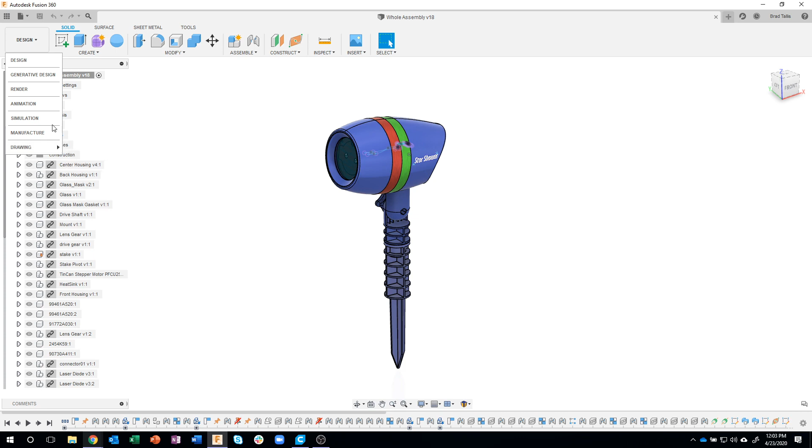Okay, so I'm going to switch into the animation workspace. I've already completed this, but you can kind of see this exploded view or exploded representation of this assembly. I'm going to go through and show you how I went about doing this.

Okay, so with the animation module, it's kind of broken down almost like editing video, for example. We have things we call storyboards. So this you can kind of think of as a storyboard.

Now I left this up so you can kind of see what the final product's going to look like, but I'm going to create a new storyboard. When I do that, a clean one basically, it's going to go back to its fully assembled situation.

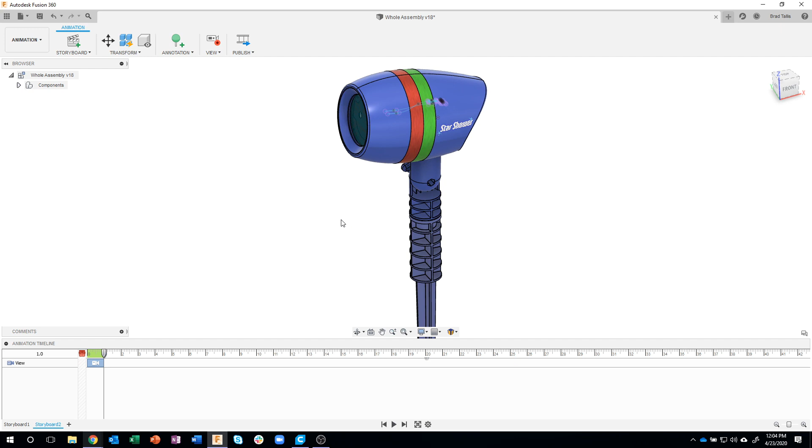Okay, in the transform menu we have a lot of commands, and you'll notice we have auto explode one level, auto explode all levels, and manual explode.

Now unfortunately - actually, I should say fortunately - we're not going to use any of these today, and the reason for it is these explodes kind of do a radial or spherical explode, and this device has a lot of components that are inline with each other inside the housing. I don't want it to go radially or spherically - I kind of want them to stay in line. So I actually find using transform components and doing it myself is faster and easier than using these explodes.

Okay, for example, when I do a manual explode, it asks for a direction and a spacing and all that kind of stuff. We're just going to transform these components, and I think you'll see why here in just a moment. Once we've transformed all of those, we can then save this and bring that into a drawing.

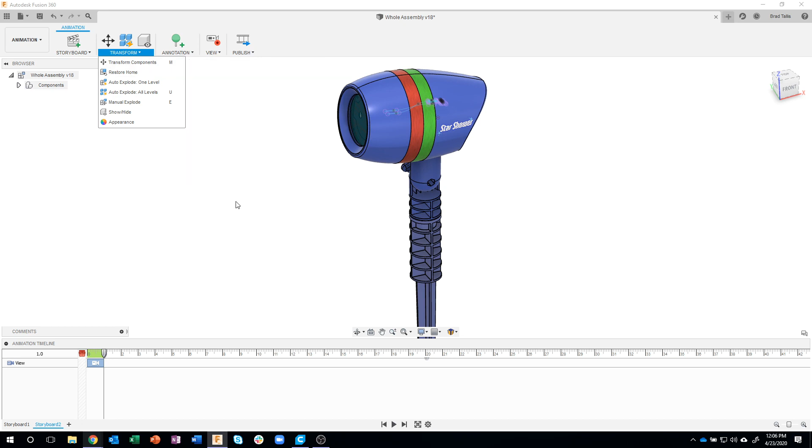So I'm going to start by just saying transform components, and you'll notice that it's asking which components - and you'll notice it's plural, which means we can do more than one at a time. So I'm going to start by expanding the components over here, and I'm going to expand open this whole assembly so I can see everything that's in here.

Now, if I look at the front view, you'll notice that the main unit is kind of at an angle, and we did that using that pivot joint, the rotational joint right here. So it's at an angle, and that's going to come into play here in just a second.

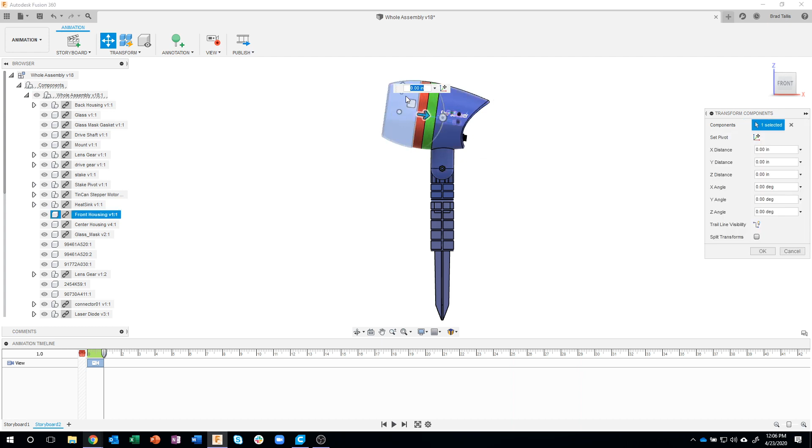So I'm going to click on that first component, and notice that the direction arrow is actually in line with this component, not just straight horizontal. So this is great. I'm going to go ahead and drag this, and it's almost like we're pulling that off of the assembly.

Now, I don't care how far. I could be very specific, I could make everything move 1 inch or something like that, but in this case I'm just going to start moving some of the components. Now I've just moved this front thing. I could go ahead and say okay, and you'll notice that it captured that into our animation timeline.

But I'm going to show you some cool tricks. I'm going to do transform. Notice it remembered my last component, so I could always come back and make a change to that. I could push that along and it's going to get recorded.

I'm going to hit the little X next to components, and I'll go ahead and grab this mount. I'm going to drag that to the left also, maybe like here. Okay, now here's my first tip.

Instead of saying okay, I'm just going to clear my selection. So I'll go ahead and clear that selection, and I'm still in my move or my transform, so I'm not having to go to the menu over and over again. In fact, we'll pretty much do everything with just this one menu over here on the right.

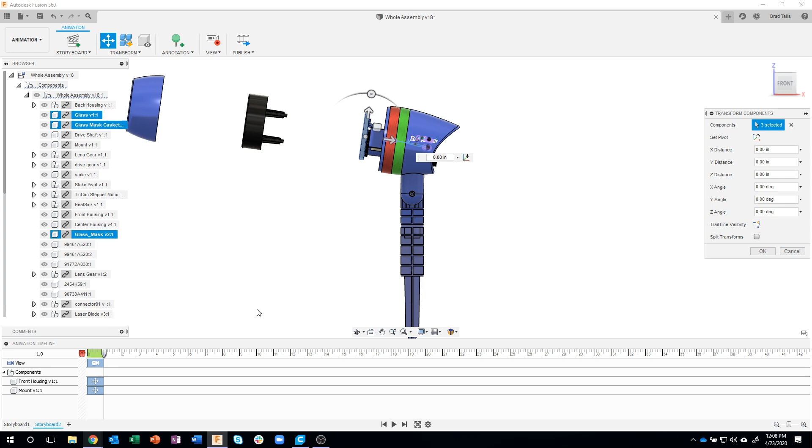So check this out. I can actually come in here and select the glass. I'm going to control my selection by holding down my control key, and I can grab the gasket, and then finally I'm also going to grab the mask. Let's just drag this to the left a little bit, like so. So it's moving all three of those components at the same time, almost like we've grouped them together.

I'll clear my component, and now maybe I'll just grab the glass, and let's pull the glass forward maybe to here. I'll clear my selection, click on the glass mask gasket, and let's just move that maybe toward the middle a little bit.

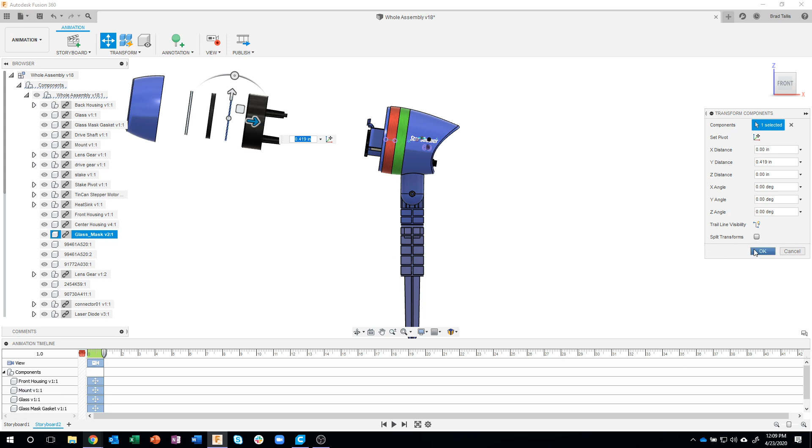Okay, and then I'll clear that, and I can either pick it on the screen or pick it from the browser, and I'll bring the mask back like so. So we moved all three of these almost like a grouping or like a sub-assembly. We moved them where we wanted, and then we kind of broke them apart. So I'm going to go ahead and say okay for now, just so we can do some other things.

But if I were to rotate this, we can now see that we've pulled all of these components out. And I can always come back and move these if I need to.

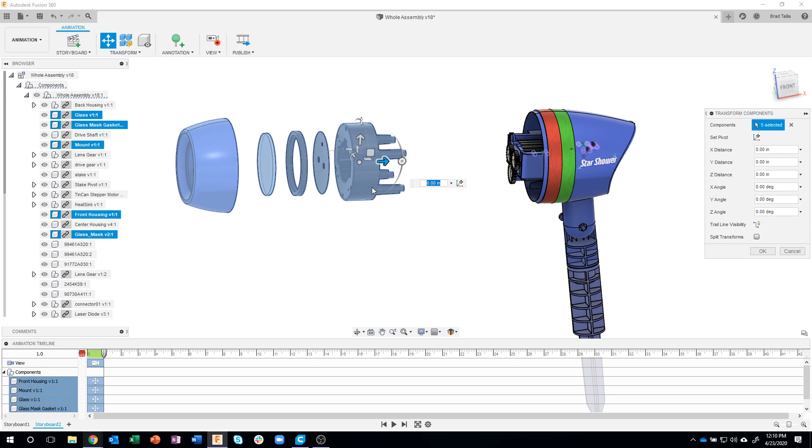So I could grab, I'm going to control my selection, grab all of those. In fact, maybe I'll leave that guy. And let's just drag those a little bit farther forward. So I can always come back and kind of tweak my design.

So let's take a look at that. That looks pretty cool, pretty evenly spaced. Okay, so that's kind of the front of the whole thing.

So now let's maybe work on the back of it, and we're going to leave the center part where it is. So I'm going to grab that guy, but I also want to move everything that has to do with this also. So I'm going to grab that guy and that guy, so the stake and the stake pivot.

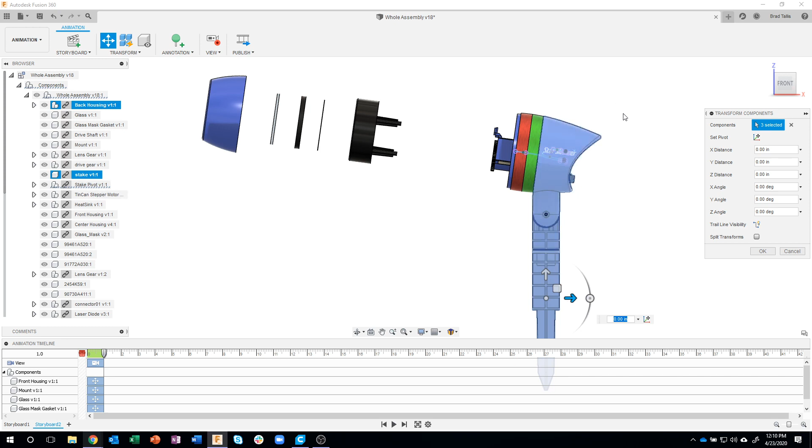We can kind of see if I scroll down all of the things that it's picked and stuff. Okay, there's the stake pivot. I'm also going to zoom up a little bit. I'm going to grab the nut, okay, and then the handle is kind of behind it.

So I'm just going to click and hold, and you've seen me use this before where you can pick through, and pick like edges and faces and stuff, but notice in here it's allowing me to actually pick different parts or different components. So I'm going to grab, this is that little knob guy, okay?

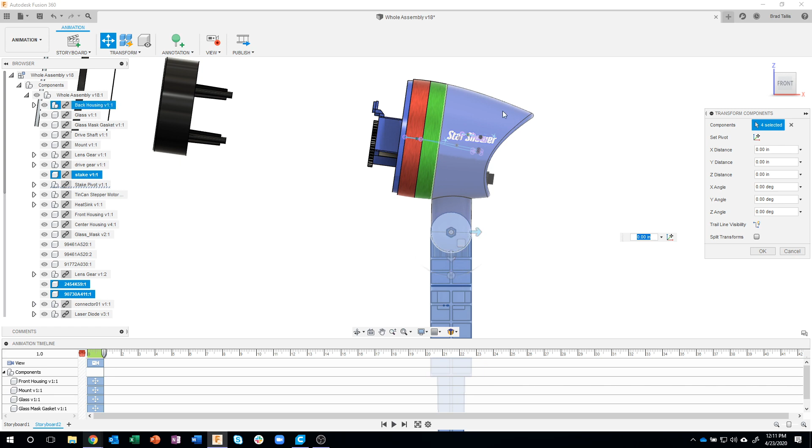Now, notice what happened with my arrows. Now they're pointing to the right and not in line with this component. So here's another little trick: I'm going to unselect this guy and then select him again. Because it was the last thing I selected, it reorients my pivot to be in line with this guy. So if it's not pointing in the right direction, you can unselect a component and then reselect it to have it be the last selection.

Or I could come in here and say set pivot. Let me put this back to normal, I'm going to set it there. Notice my pivot is now on the last thing I selected, which was this stake pivot, but the arrow is pointing the wrong direction. So I'm going to say set pivot.

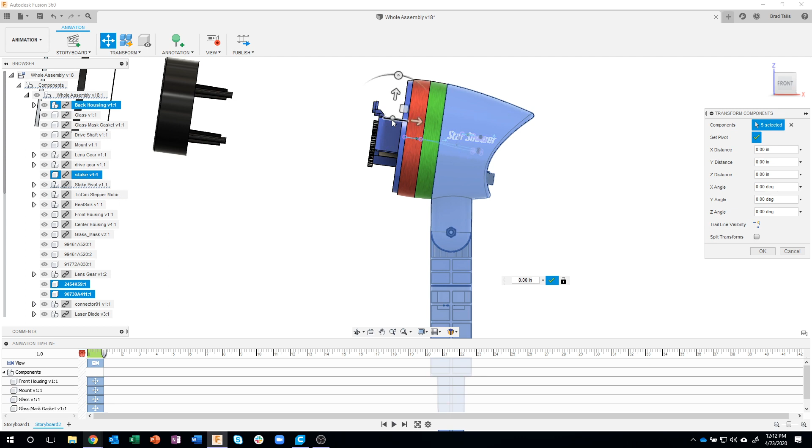And what this allows me to do is reference anything else. So I could come over here and click on an edge, like this edge, or click on this part, and it's going to reference that. Now you can see it jumping around because there are a lot of edges, but I'm just going to click on that face, for example. Now I have to remember to say I'm done setting my pivot.

So I'm going to check that, and now I can drag these components pretty far back because we have a lot of stuff going on in there. I'm going to drag this back to here, and you'll notice it's staying in line with this. In fact, I could even turn on trail visibility if I wanted to, and it's going to show the direction those lines are going.

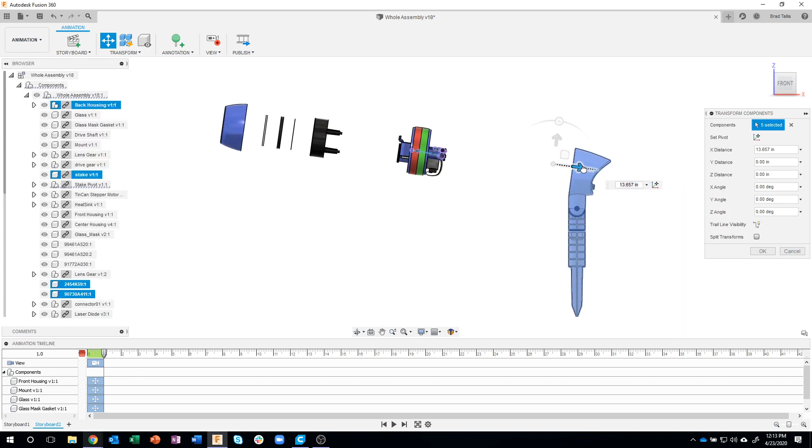Let's just go maybe to right there, and pull it back just a little bit further. I'll hit the little X right here, and now I can grab this component and this component. Again, notice the orientation is incorrect, so I'm going to set my pivot. I'll just click on an edge or a face or something like that, and drag this down.

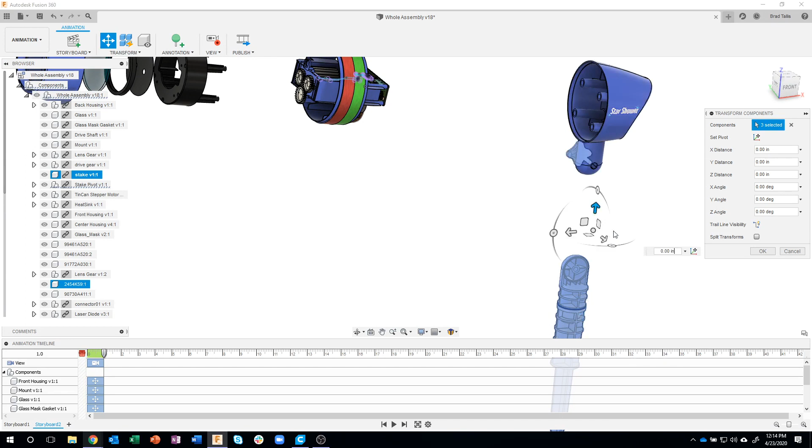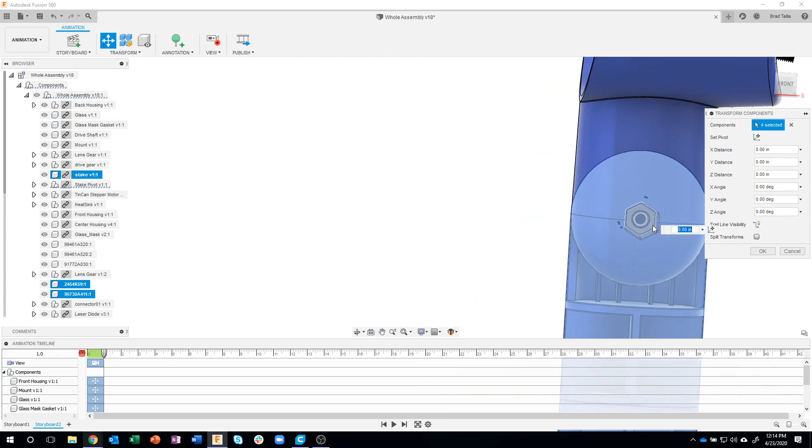Now, if I rotate, you'll notice I forgot to bring the knob and the nut at the same time. If I just add that in there, it's not going to snap down, so I'm going to undo so it goes back to where it needs to go. Then I can control select. So undo can really help you in situations like this where I accidentally forgot something, or I moved a whole bunch of stuff and one little screw didn't move. I could undo back and grab it.

So now I'm going to drag this down, and sure enough, the knob and the nut moved with it. I'll cancel that guy, click on this guy, and let's move that one down just a little bit. I'll cancel or uncheck my selection. I'll click on the knob, and I'm just going to drag it back.

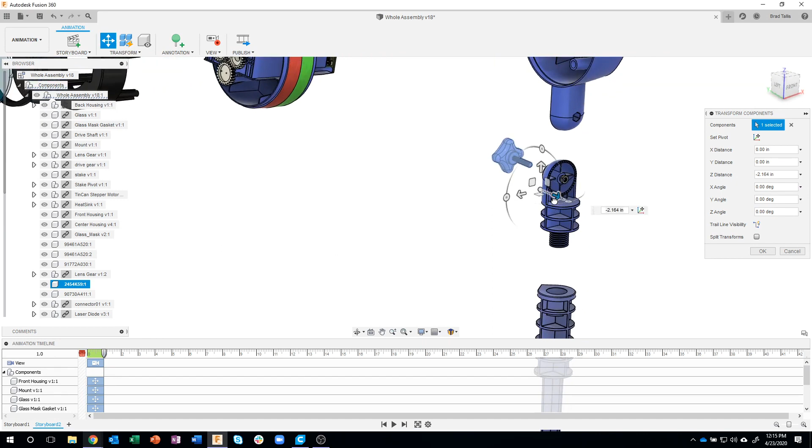I'm doing this in 3D so you can see what's going on here, and sometimes I'll rotate around and get it positioned where I want it, like how far back do I want it. Because I'm going to end up creating a drawing of this isometric view, so sometimes I'll try to get my view to be kind of isometric like this and see what's being blocked, do I need to spread these things out a little more. I try to get it as close as I can to the view it's going to be. So for example, I just clicked on this corner of the cube, and I can see I could probably bring that knob back in a little bit.

Let me click on the hex nut there, and I'll just bring this over here a little bit, kind of equal spacing. So that's another tip I'll use, is I'll get this in the orientation that's pretty close to what I want it to be.

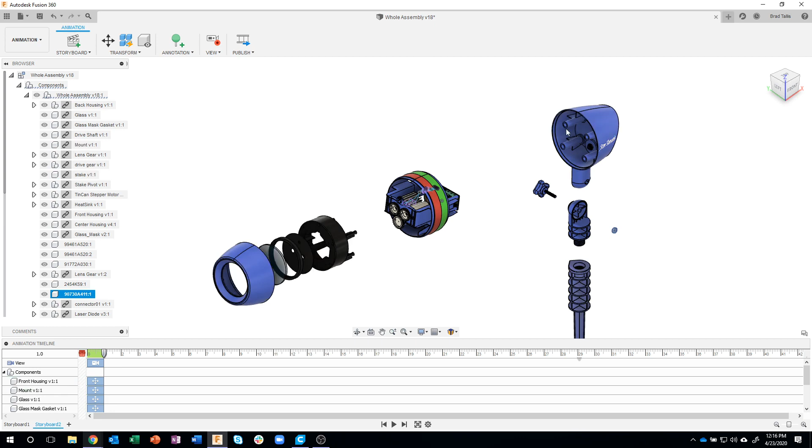Okay, so pretty quickly here we've broken apart the front housing stuff and the rear housing stuff. Now what's left is all of this center stuff. So I'm going to do the exact same thing. I'll say transform, and let's just grab these gears. I'm going to control select these gears, and I'm just going to bring them forward a little bit, somewhere like so.

I'll leave them grouped together since that's kind of how they're going to end up on the actual assembly. Now here is where I want to start working with this circuit board.

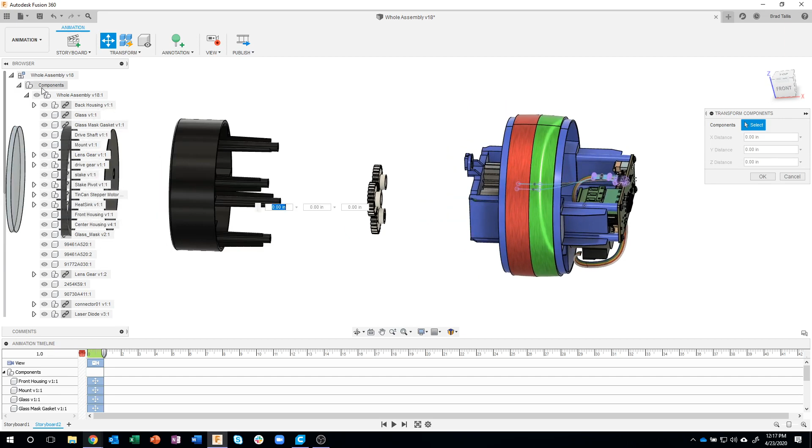There's actually a lot of components. You'll also notice some wires and some sketches going on. Now you're going to see here pretty quick, we're not going to be able to move the wires, and they don't even show up in my browser, but we'll get to that in just a minute.

If I were to come in here and select the star board, if I were to just grab the board in this particular situation, you'll see sure enough it moves the circuit board, but all of my connectors stayed put because I added those later.

I've got these screws in here that kind of hold the board. Maybe I want to move all of those together. Okay, so I'm going to undo back.

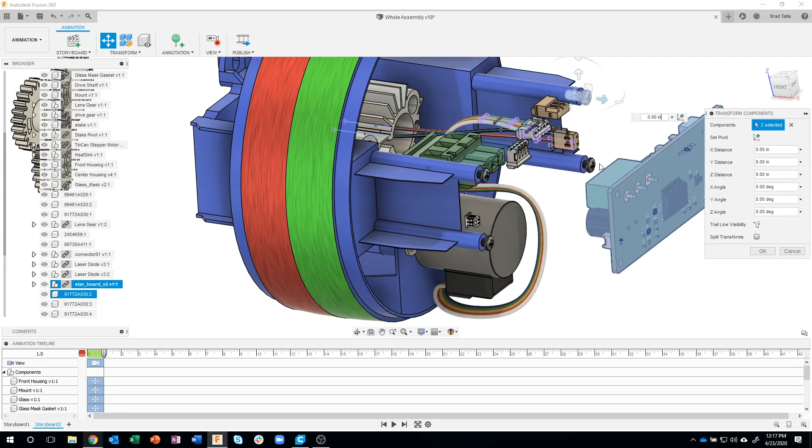Now I can come in and select, for example, I'm going to add - oops, let me, because I moved, it wanted to jump again, so let me do that again. Let me go move. What's the component? So I'm going to grab the star board. Scroll down here. I'm having a hard time seeing. There it is. So I'm going to say that's the star board. I'll zoom up so I can make sure I'm grabbing everything I need.

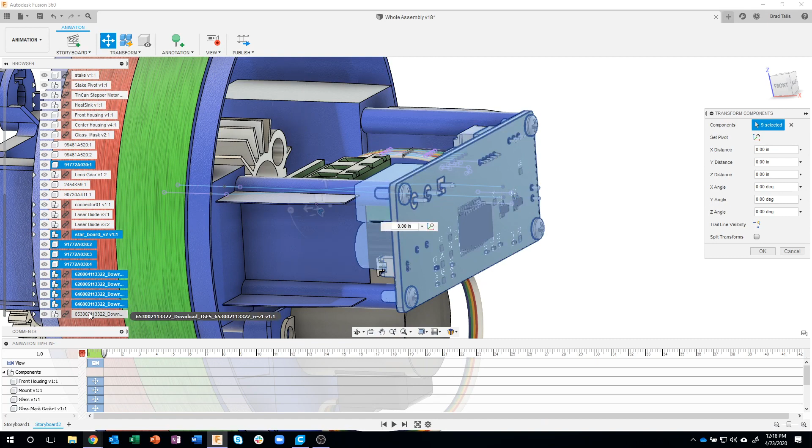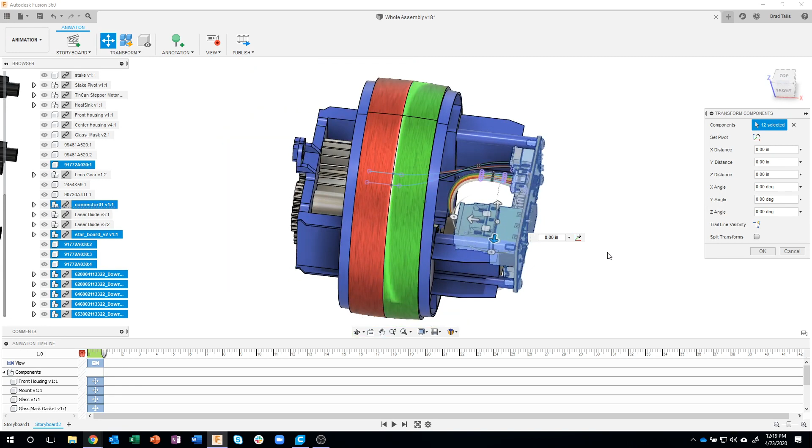So I'm going to select these 4 screws, and I can either do it on the screen itself, or I could have done it from the browser. Then I'm also going to make sure I grab my connectors, and I can kind of see just by hovering over these, they highlight on the screen. So I know that those are my connectors, so I'm going to add in all of those connectors, and then finally I have one more connector on here that I want to make sure that I add, which is this guy. Okay, I want them all to move together. And let me make sure I'll grab that guy also. Okay, so anything that kind of has to do with the board and the connectors.

So I'm going to zoom out a little bit, kind of see how much room I have, and let's just drag this back a little bit. Okay, maybe somewhere like so. I'll stop my selection. Let's zoom up here, and sure enough, I see some wires and stuff, but like I said, I can't move those wires. But it looks like everything that I wanted to move did move, so that's good news.

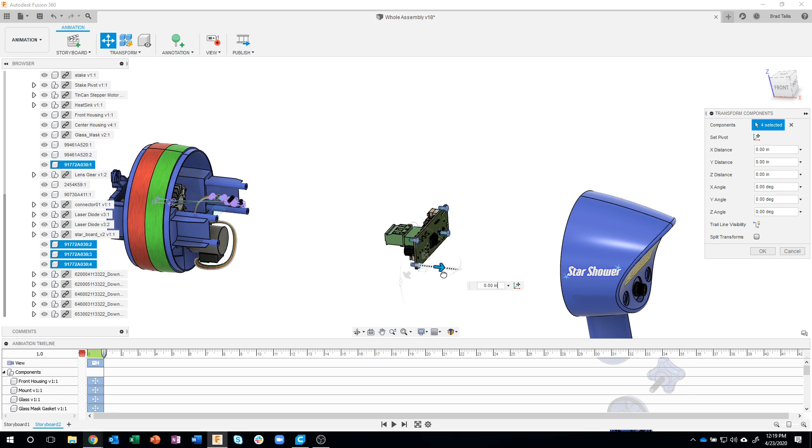Well, now I want to show the screws kind of assembling this. So I'm going to grab that screw here, here, and here, and here. Now again, I could have organized my browser. I could have created a subcomponent called screws and put these 4 inside that subcomponent and then just moved that subcomponent, for example. So kind of a quick way to speed things up. But there we go. Okay.

Now, since everything's looking pretty good, I'm going to grab the laser diodes, those 2 laser diodes, and I'm also going to grab the heatsink at the same time. And let's just pull those back a little bit, like so. Maybe I'll bring the heatsink back a little bit. And now you can kind of see, didn't give myself enough room, for example. But that's okay, we can move things around. So I'm going to go ahead and now grab the laser diodes.

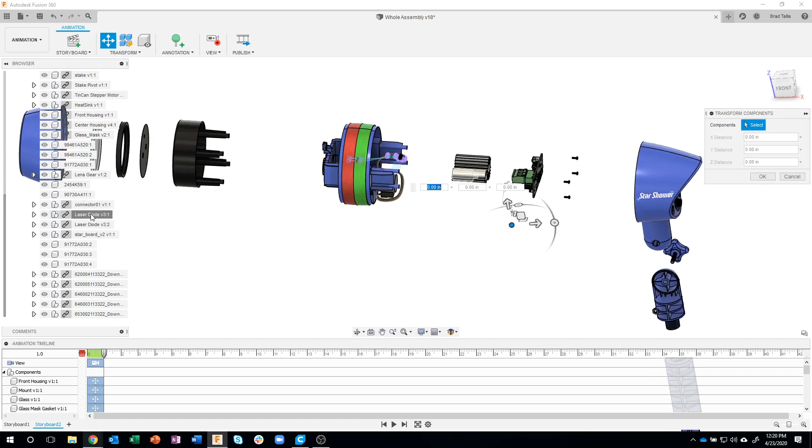And notice in this situation, my pivot is not pointing in the right direction. So I'm going to set my pivot, and I'm just going to grab one of these edges of this heatsink. That should be good. And let's just drag that forward a little bit. And now we can kind of see that the laser diodes are going to go into the heatsink. The board and the screws are all going to assemble back here.

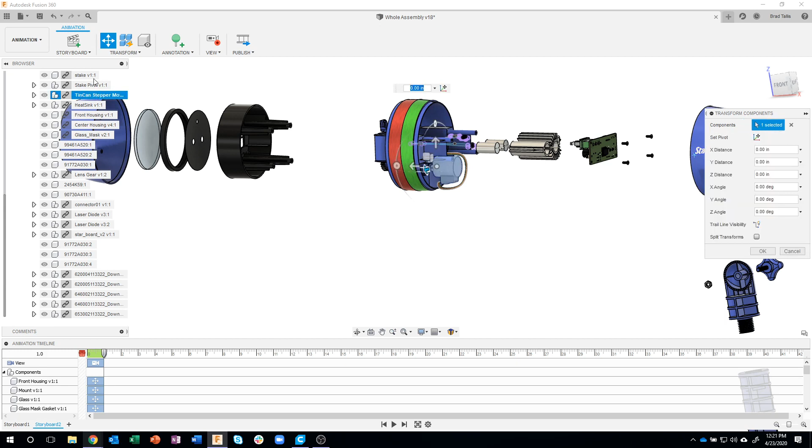Let's work with the stepper motor now. So I'll do a transform, and let's just look for the tin can stepper motor, which is right here. This is another reason why you definitely want to label your parts, give them names. For example, I also need to move the drive shaft. There it is. If I left everything numbered 99461A or whatever, I'd have to turn parts on and off. It's much more difficult. So definitely give your parts some names.

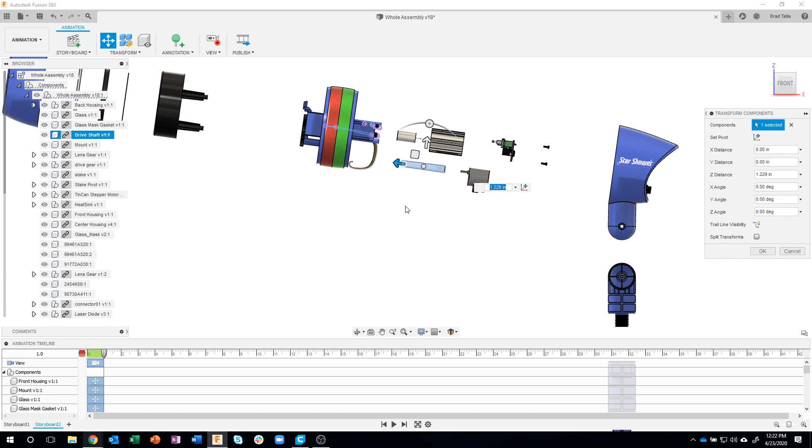So I'm going to slide the stepper motor back, and move it down a little bit, and back. Then I'll grab the drive shaft and pull that off of the stepper motor a little bit, grouping a lot of the internals right here. I must have undone too far back, so let me move the gears back. Let's do that guy, and that guy, pull them forward. Okay, so we pretty much have everything out of this center housing except for these wires.

Now, if I look over here, you will not see a bodies folder, only components. In fact, if I fold that up, pretty much everything goes away. In my example, these wires are actually a body, not a component, so I don't see them in this list. So how do I get rid of them?

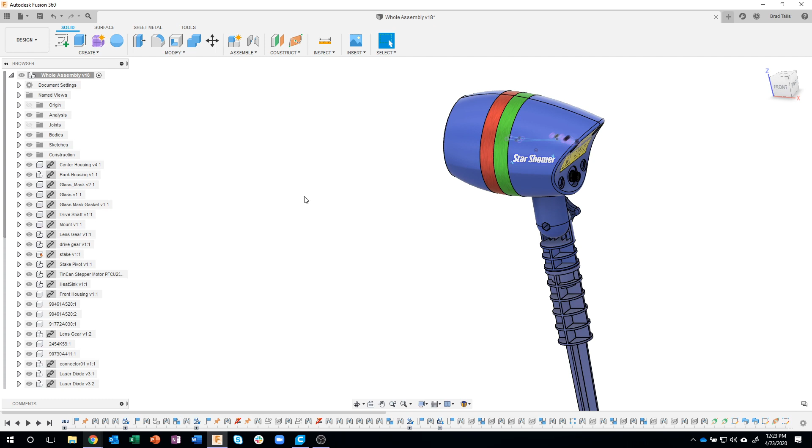Well, all I need to do is switch back to my design workspace. Notice it's all assembled because we're only doing that exploded view in the animation workspace. Let me turn off the back housing so you can see what's going on. I'm going to turn off the bodies and you'll see those wires disappeared.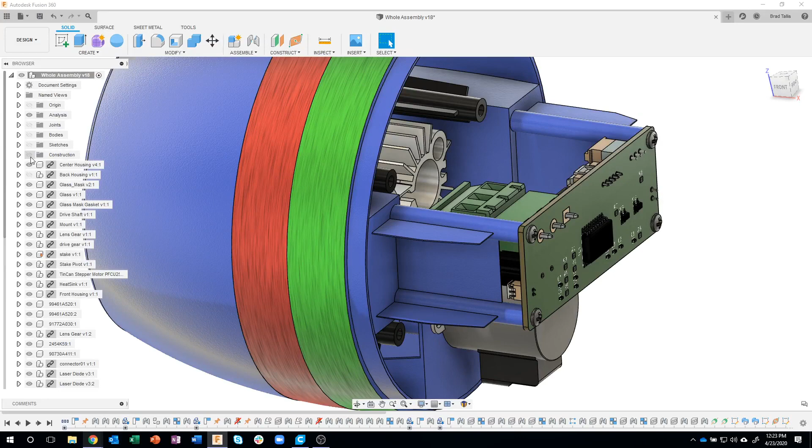You'll also notice some of my construction geometry and sketches used to create those wires are being displayed, so I could turn off my sketches. And finally, those little axes you see in here, I could turn off my construction and those will go away. I'll turn the back housing back on.

Then I'll switch over into my animation workspace, and we'll see that those are no longer being displayed. So you can turn them on or off just by going back to the design workspace and turning off those bodies. So pretty quickly, in just a few minutes, we created this exploded view.

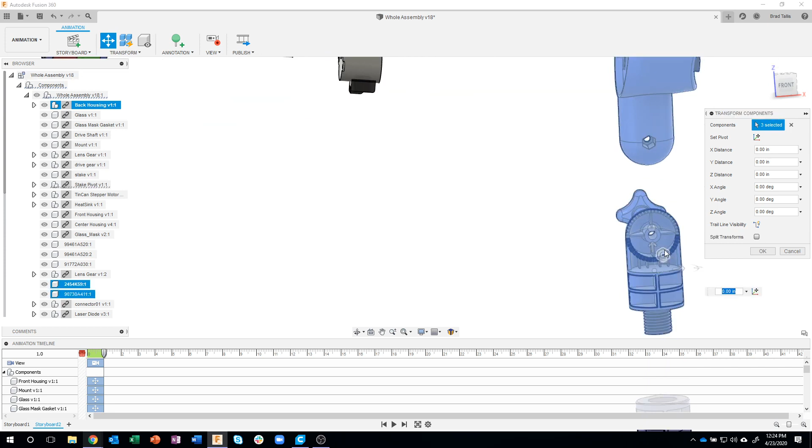Now I might come in here and make some changes, for example bringing these guys back closer. I'm just going to select these features, making sure my pivot is pointing in the right direction - I can reference anything to do that. So I'll grab one of these ribs because it's pretty easy, and bring that forward a little bit like so. Then maybe the same thing with all of these guys.

So I can just grab these four components here and bring them back a little bit, like so. Now everything's kind of evenly spaced. I'll go ahead and say okay, and we now have this exploded view of our assembly. I'll go ahead and save, and say created exploded view.

I'm not going to spend too much time talking about how to do individual step animations, but I will show you a cool little tip here. You'll notice that all of my components have this little move icon next to it, and this move literally happens in 1 second. So I'm going to come in here and hit play, and you'll see that pretty quickly it explodes out.

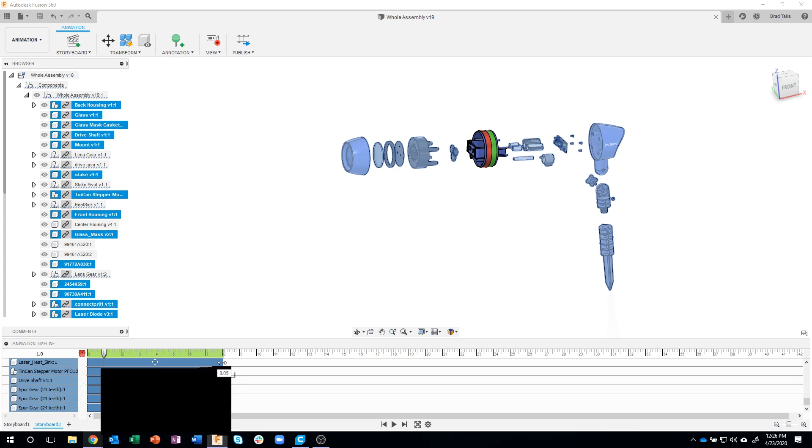Well, maybe I want to show an animation of this thing exploding out, but I want it to last much longer. So I'm going to select that first component, scroll all the way to the bottom, and shift select that last component. Then I can drag this to the right, to about 8 seconds, and let it go. Now it's having to do a lot of thinking, so it might take some time. But notice what it did - it now extended this move to last 8 seconds.

And in fact, my little target here is at 1 second - we can see it's barely opened up. So let's take a look at that. I'm going to scroll back up to the top, rewind, and hit play. You'll see the parts explode out over a series of about 8 seconds.

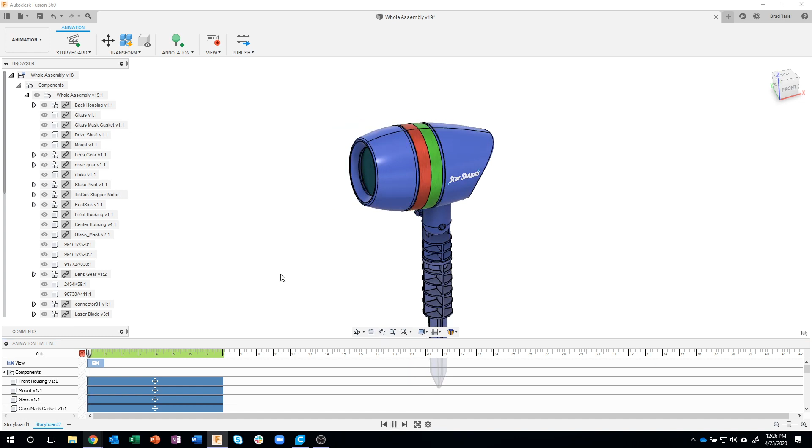Now you also saw the camera move a little bit. So if I start here, you'll see it's kind of close up and then it zooms away - that's this little camera icon right here. It actually records any movement that I do, but I could also stretch that guy out to about 8 seconds.

And now as it explodes, it's going to be much slower as it pans away and makes sure there's enough room for all of these parts to be displayed in the viewport. Kind of a cool little tip there. If you wanted to show how this thing explodes out, you can change the length of how long it takes just by dragging these out.

Now I do have a live stream all about the animation module, so I'll try and remember to link that, where I go step by step and show all of the different options. I'm not going to go into that much detail in this live stream. I just wanted to get an exploded view.

Okay, I'll go ahead and save it since we've made some changes. I'll say exploded slower. Okay, there we go. I'm done with this, so I'm going to switch back to my design workspace. You'll notice that it's put together - we have not physically moved any of these, we only did it in the animation workspace. Well, now I want to create a drawing set.

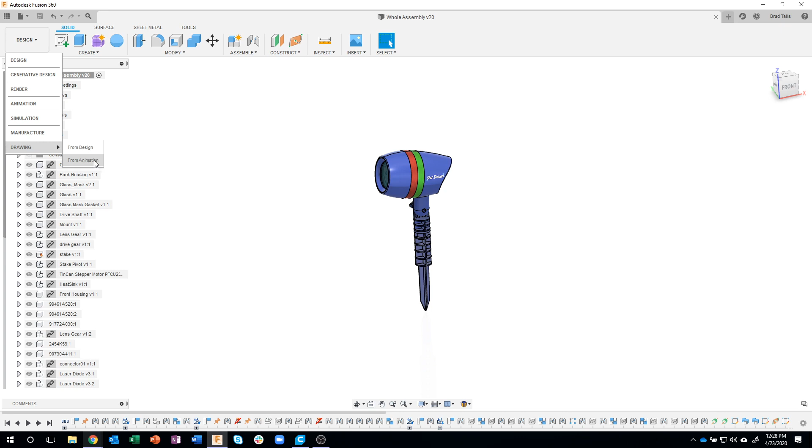So I'm going to come in here and say Design, Drawing, and you'll notice it says From Design or From Animation. This is how you can actually create an exploded view. So I'm going to go ahead and click on From Animation.

Now you'll notice it jumps back into the animation workspace and it gives me some options here. Which storyboard? Storyboard 1 or Storyboard 2? You can have multiple storyboards.

So for example, maybe you're doing something really complicated, like you're taking apart a V8 engine. You might not want to have 300 steps. You could break it down into smaller storyboards where you take the top of the engine off - maybe that's one storyboard - and then the second storyboard is removing all of the pistons and cams and stuff like that. For example, you could do multiple storyboards.

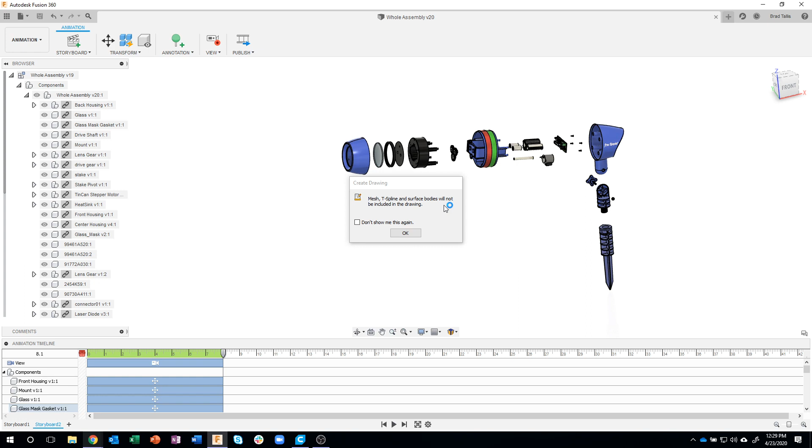Well, in this case, we'll do the one we just created. I'm going to do maybe like a D size drawing in this case, and I'll say OK. Notice it gives me a warning here saying mesh, T-spline, or surface bodies will not be included. Why is it telling me this? Well, because I might have some mesh objects, some T-spline objects, or just plain surface bodies, and those will not be displayed, but that's okay. I don't have any of those in this particular design, so I'll say okay.

I just glanced at the chat really quick and Peter asked a question: how do I delete a storyboard? That's a great question. I'm going to create this drawing really quick and I'll answer that for you.

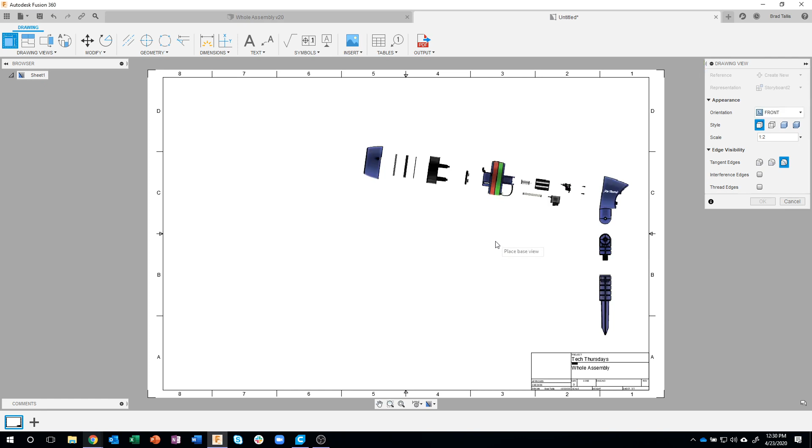Okay, so you'll notice it has my title block up and then you see this exploded view on my cursor basically. Now it's pointing a different direction than what I want it to be, so that's this orientation right here where it says home. I could change this - I could say show me a front view exploded and watch what it does. It'll give me that particular view, for example.

Or I could come in here and you can see all of these different isometrics - southwest, southeast, etc. Let's try a northwest isometric. And that is what I was looking for. That's the direction, and this is why I was talking about earlier - I try and get my view the way I want when I'm doing my exploded view in the animation module, so I kind of know how it's going to look when I come over to the drawing.

Okay, it's 1 to 2 right now. Let's try 1 to 1. I should be able to fit most of that onto the screen, so I'm going to go ahead and place that. I could tell it I want just visible edges, or I could make it shaded, which I'm going to do in this case. I could make it so no tangent edges are displayed. I'm going to make full length, and I'm going to just go ahead and say OK. It's going to create a shaded representation of this assembly in an exploded form.

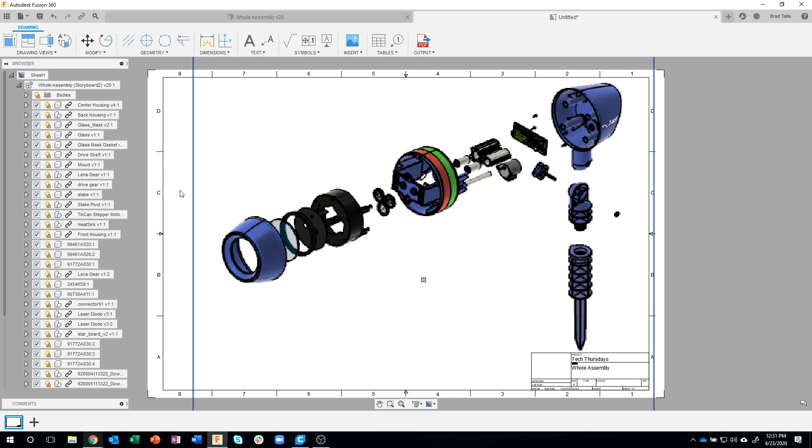Takes a little bit of time to generate that, but now you can kind of see what that looks like. So the next thing I want to do is create a bill of materials.

I'm going to come over to this table icon, click on it, and place it down here near the bottom. You'll notice it's going to overlap my drawing, but I'll place it there anyway. It placed my table, but unfortunately it's overlapping - we'll fix that. You'll also notice it automatically created these balloons for me.

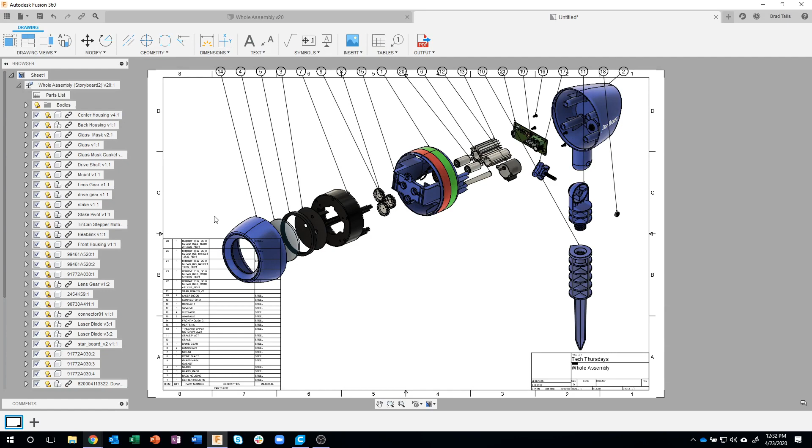Now they're off my drawing because of the scale I used, but I'm going to show you a cool tip on how to fix that. The first thing I want to do is make sure this table doesn't overlap my view. Maybe it would have fit up here, maybe it wouldn't have. Well, here's a cool little tip.

I'm going to click on my table, and you'll notice this little triangle icon right here in the middle. I'll click and drag, dragging to the right, and you'll see another table appear. In fact, I can keep going and it splits into 3 tables. I'll do something like this - pick, and it basically split my table in half, or as you saw, I could even make it go into 3. Now it's no longer overlapping my drawing.

So let me do that again. I'll click on it - and you can hear my dog snoring in the background, I don't know if the microphone's picking that up - but I'm going to drag it to 3.

That was crazy loud. Sorry about that.

I'm going to drag it like so, click, and you can see I actually split the table into 3. You can always come back and change that, so I can bring this back up and bring it back to 2, for example.

You'll notice there's quantities and all that kind of stuff, and the names of them in here, and what material they're made out of. Now, I didn't mess with materials at all - I probably should have, you know, make it glass, plastic, aluminum, etc.

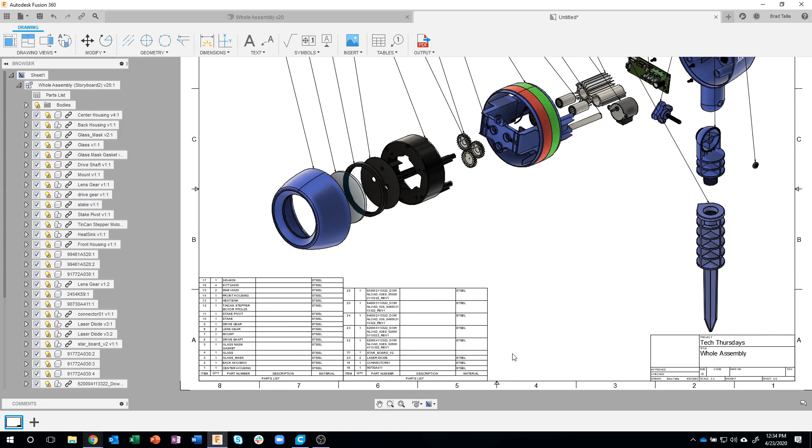And I will show you - Jason, don't let me forget to show that. At the end, I'll show how you can do that.

Okay, so now I have the table the way I want. Now I have these balloons, and you'll notice that they're pointing to my objects, and most of them are pretty good - they're kind of near the center - but for example, like this arrow here is kind of toward the back.

If I just click on that arrow, I get this little gray box, and I can drag that and move it to anywhere else on the object. Let me make sure I'm dragging that guy - so for example, you can kind of see right there, and it's going to snap automatically to that object.

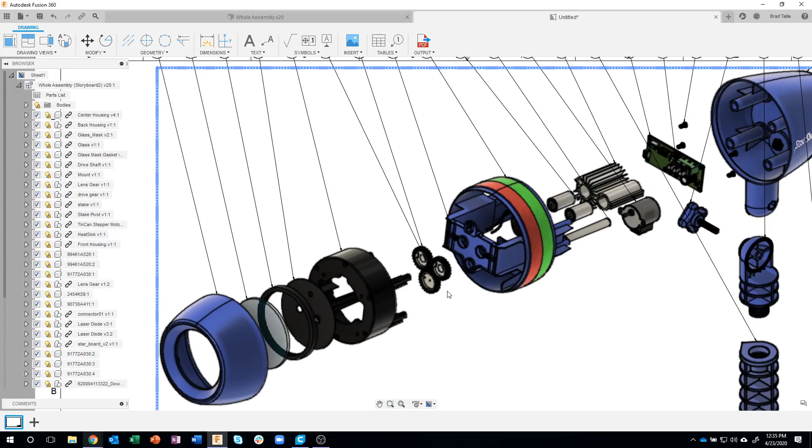Same thing with this guy here - I can move him to be more in line with the body itself or whatever. So even though it automatically creates these for you, it's not 100% perfect. I might want to come in and change some of those, and also change where the balloon is.

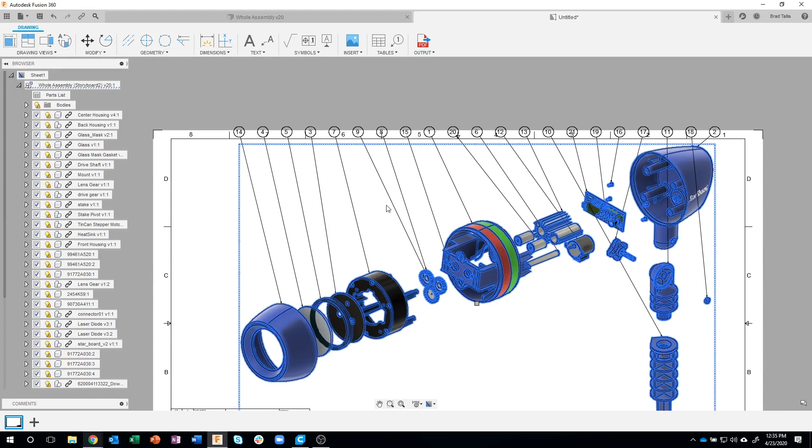For example, this balloon is pointing to this bottom gear. I'm going to grab the number, drag that gray box, and bring it down here. Then I might also change where it's pointing to - let me grab and point it to maybe an edge here. Now the balloon and the arrow are pointing to that bottom gear.

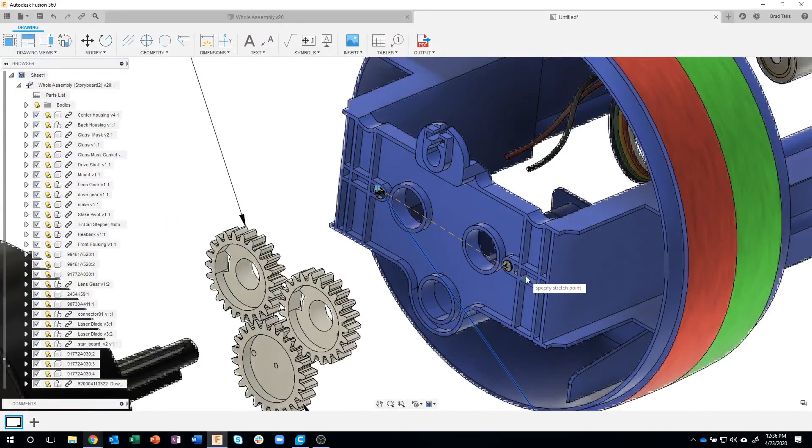Same thing with maybe this guy, number 15 - it's pointing to a screw, so I might bring that down a little bit. I'm not too worried about whether they're lined up, because you're going to see a really cool trick in just a minute. So I'll move that to this screw over here. Obviously I forgot to explode those screws out, so I could go back and make that change, which I probably will in just a minute.

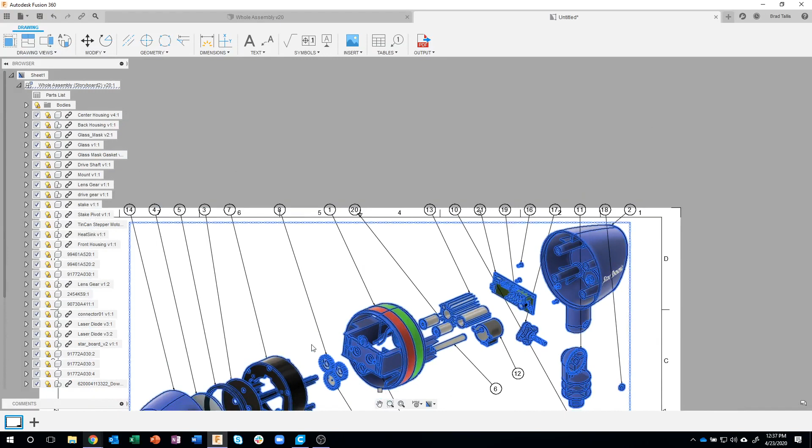Same thing with the drive shaft - that's this guy, so let me just move him down a little bit and move the arrow over, bringing that to here. Now it's positioned down here - a little bit of cleanup, not too bad. Let's do this, and I could maybe point to that guy there. We'll get to these back here in just a moment - I just kind of wanted to clean some of this stuff up.

Now here's a really cool tip. All of these numbers, these balloons, are kind of in the wrong location. I'm going to go under Tables and say Align Balloons.

So it's asking which ones do I want to do. Let me come in here and make sure I'm grabbing these guys. Let me go Table, Align Balloons. So I should be able to grab a bunch of these, and I'm going to just click on a whole bunch of them like so.

Maybe I'll just start with those, and then it says I'll hit Enter. Then I can pick one of these and watch what happens as I'm moving around. So I made a mistake here, I'll fix it in a little bit, but you can kind of see I can align these balloons.

So what I should have done, I'm going to escape out. What I should have done is got one where I kind of want it to be, right about here. Darn it, clicked too fast.

So I'm going to just say, for example, right there. Then I can come in and say Align Balloons, and select the balloons that I want. I'll just quickly grab these guys like so, and hit Enter. Now it says specify a start point.

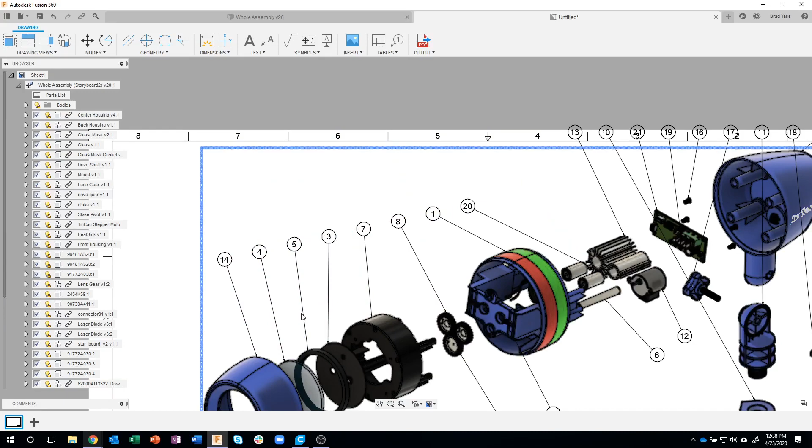And so I'm starting at that original balloon, and you can kind of see how it's going to let me put these wherever I want, and they're all going to be lined up. They're still pointing to the objects no matter how closely spaced they are. So I could do something like that, and now they're all in line with each other.

And I can still come in and make minor changes, like I want it to snap there, for example. Same thing with these guys. Obviously this number here needs to be over here somewhere. Maybe this number here I want to be down here, and I'll point that down there somewhere.

Okay, so what I can do now is come in and maybe position these guys and fix these ones that are kind of crowded up in the corner. I'll do the exact same thing, say Align Balloons, and pick the ones that I want.

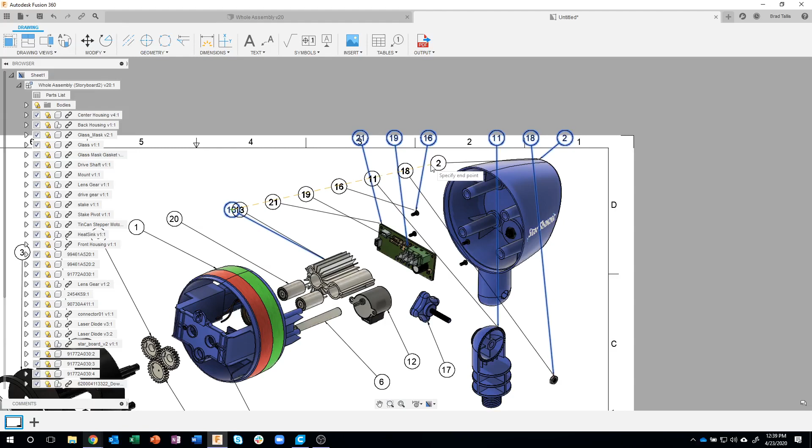And I'll obviously fix number 18 here, specify the first point. And then this will let me maybe make this look a little bit nicer, like so. I'll point this guy right here, something like that, and then bring the other ones that I don't need down here.

So it's a really quick way. Yes, it auto balloons them for you and auto positions them for you, but then you can come back and make minor changes until it looks really nice. In fact, I'm just kind of dragging these around a little bit, and now I've got things looking the way I want.

So let's do the exact same thing one more time. Align Balloons, I'll just grab these that I've brought down here. Maybe start right here and bring them over, something like that, so they're all in line. And then over here, I can say these three, Enter, and I want those lined up vertically like so. Now I've got all of these things labeled with these balloons.

Now, the next thing I want to show, and it's going to be kind of hard to see because it's such a big drawing, but notice item number 1 is called center housing. So I've got all these balloons, and item number 1 is the center housing. But maybe I want to organize these so they make more sense, so they're in the correct order.

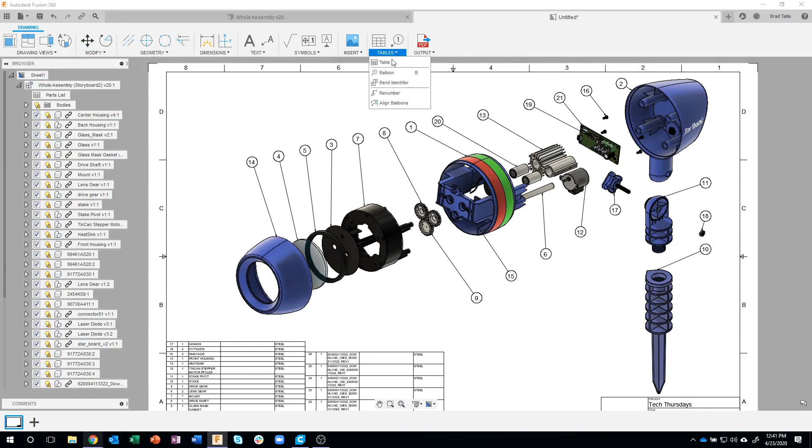So under tables, I can say renumber. I'm going to zoom up a little bit so you can kind of see the whole table here. As I'm going through, watch what happens to this table. It says, what's your selection and what's your starting number? I'm going to click on that guy, and it's going to be number 1.

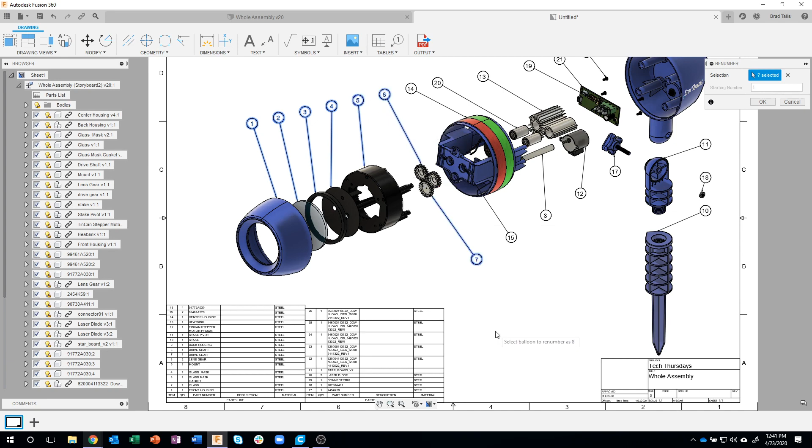And then I'm just going to keep clicking and watch. You're going to see the table actually moving things around as I'm going through. So I'll make that 6, maybe I'll make that guy 7, we'll come back up here to 8, etc. So I'm just going to keep clicking, and you can see how it's renumbering these guys.

And then we'll make that 15, 16, 17, 18, 19, 20, 21. I'll say okay, and now I've renumbered these.

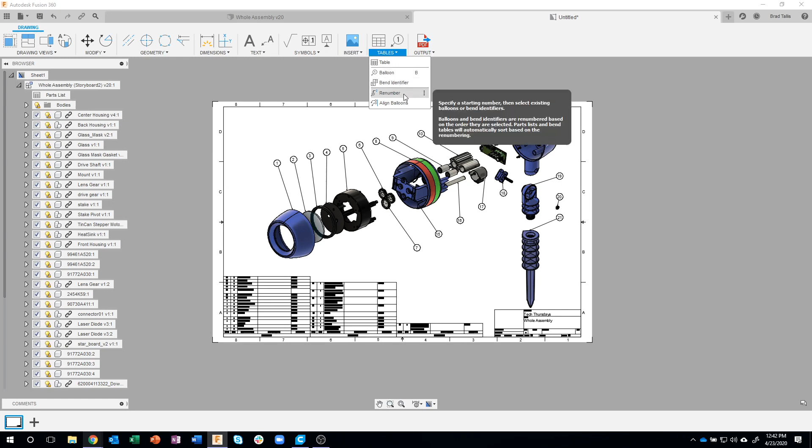And now we can see number 1 is front housing, which makes sense, right? And it used to be center housing. Center housing is now number 8, and if we scroll up here, sure enough, number 8 is center housing. So I really like not only being able to create the table and make it look the way we want, but the fact that you can come in here and renumber those and align the balloons the way you want. You can point the arrows where you want to make your drawing look really nice and sharp.

I wouldn't just use the default solution that it gives you. Spend a little bit of time fixing things up.

Let's move on. So now I have what I'd say a pretty cool looking exploded view of our assembly. So now I want to start breaking out the single parts.

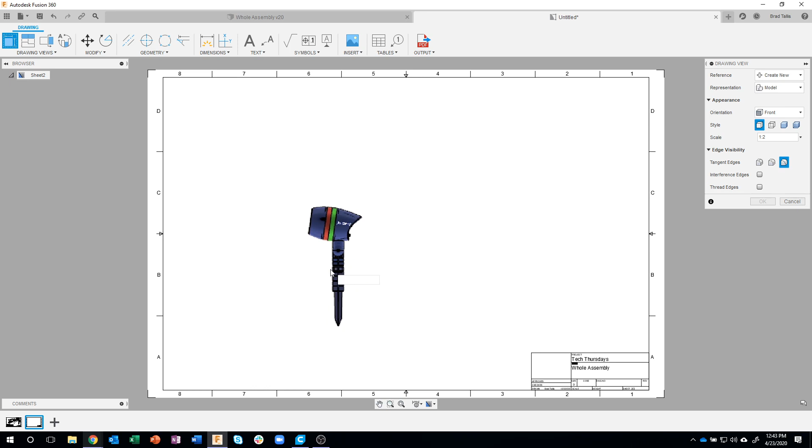I'm going to hit this little plus symbol, and this allows me to create another sheet in our drawing set. Then I'm going to say I want to create a base view, so I'll click on that icon, and it's going to allow me to place a base view.

Now I want to do individual components. So I'll set this to 1 to 2, and I'm just going to click on my screen. I really don't care where or what right now. I'll say OK, and you'll notice it lists everything in our whole assembly and creates a drawing representation of that.

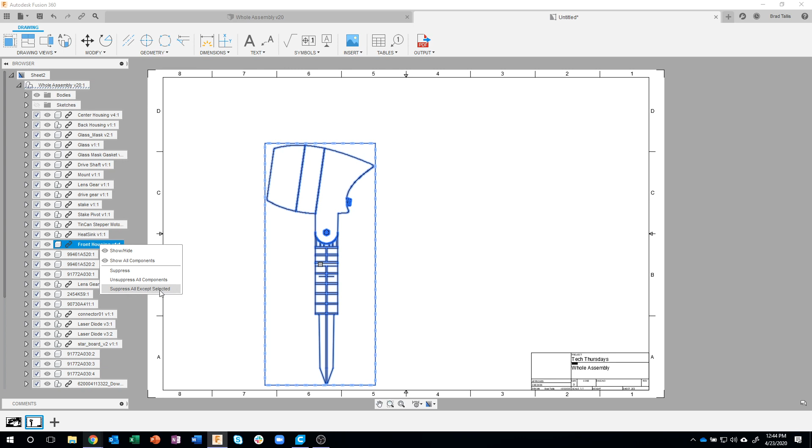Well, I want just the front housing, so I'm going to click on front housing, right mouse click, and notice I can either suppress just that one, or say suppress all except selected. That's the one I'm going to use. I'll say suppress all except for selected, and you'll notice it turns off all the other parts and only draws this front housing.

Now most of you are probably going, something's not looking good here. So we're going to fix this. You'll see here in just a second.

So now I'm doing my projected view. I'll go here, maybe do one of these isometric ones. And these don't look good, right? Well, why is that? Let me go back to my design here.

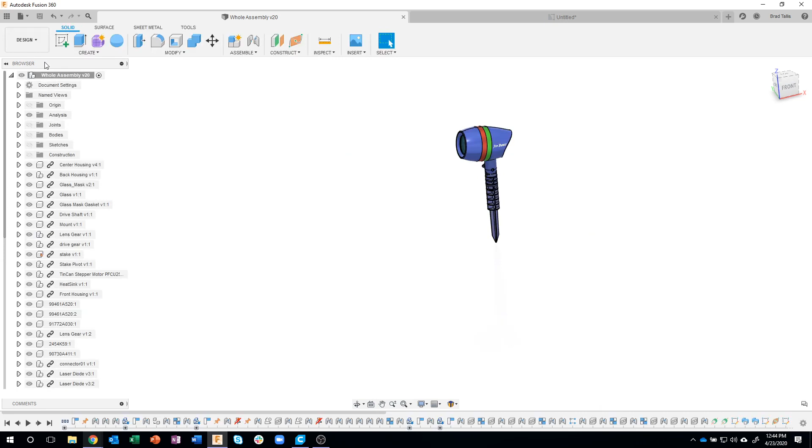If I look at the front, I told it to create a front representation, and sure enough that's what it did. But this whole assembly is tilted. So how would I get a true front representation here?

Here's another neat little tip not a lot of people know about: named views, and it's folded up. If I expand this open, you're going to see top, front, right. In fact, I could click on top and it shows me a top view. I'm going to click on front. It's almost like clicking on the cube over here.

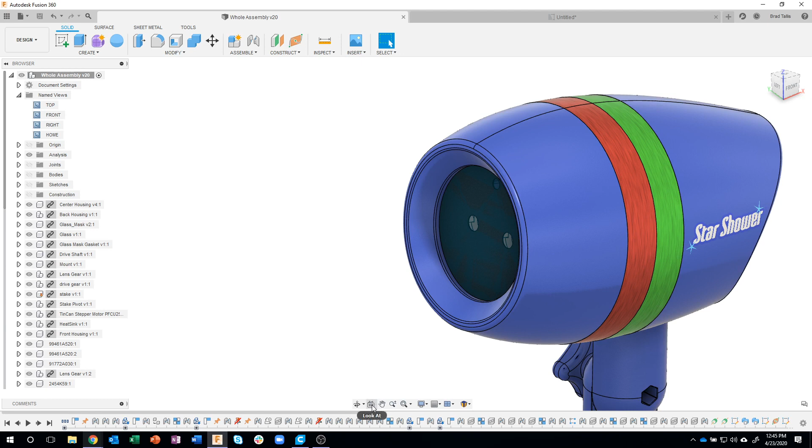So what I'm going to do is rotate a little bit isometrically, and there's a command right here at the bottom of our screen called Look At. That allows you to click on any face, and it's going to look right at that face. So I'm going to say Look At, and click this flat front face right here. And we're now looking exactly at that face. Let me show that again.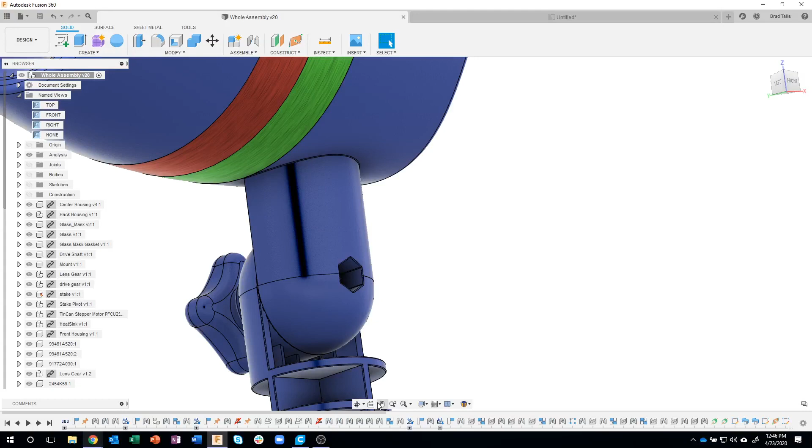Maybe let's try something a little weirder. I'm going to say look at, and click this flat face of the hex, and it's going to look straight at that face of the hex nut. Okay, kind of a neat little trick. So I'll come in here and say look at, and click that front face.

Then I can right click on my named views and say new named view, and it creates a new view. I can even give it a name. I'll call this true front, or maybe angled front — that's what I should call it. Angled front view.

Now watch what happens. If I go top, right, etc., home — if I click on this angled front view, it's going to go right to that view. So it's a neat little trick.

Okay, so I'm going to go ahead and save because I've made a change. I'm going to say added angled view.

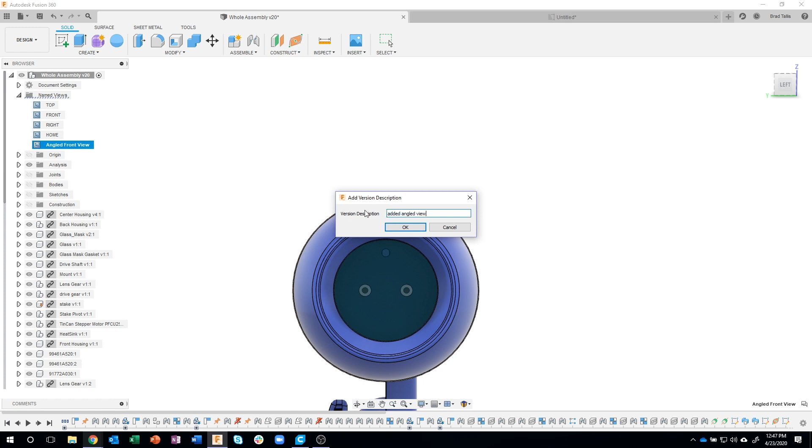Then I'm going to come over to my drawing. And when I come over to my drawing, you'll notice it says warning, changes have been made. That's because I've updated my assembly. So I can click on this little icon right here, and it's going to update my drawing to be using the latest and greatest representation. Now, we didn't change any 3D models, so we wouldn't see anything change on here or anything change here either.

For example, if we punched a big hole through the front housing and saved that, when I came to this drawing, it would complain and say this drawing is not up to date. And when I clicked on that icon, it would recreate this view to have that big hole through the front housing. So what do we do about this?

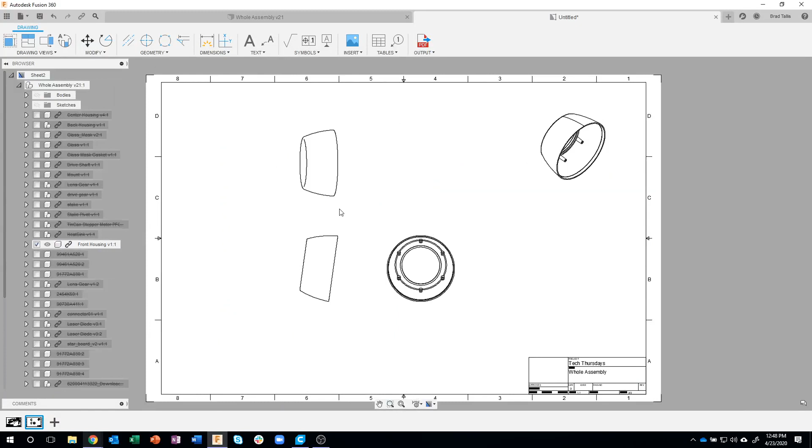I'm going to edit this front view, so I'll say edit view, and notice it says orientation is front. If I click on this down arrow, you'll see we have my saved view that I created, that angled front view. I'll click on that, and notice it's now looking straight at that location, and my views are correct.

So hopefully that makes sense, what I did there. Even though the part is rotated at some weird angle, I still have the ability to look at it straight on. I can come in here, edit my views, and make that solid.

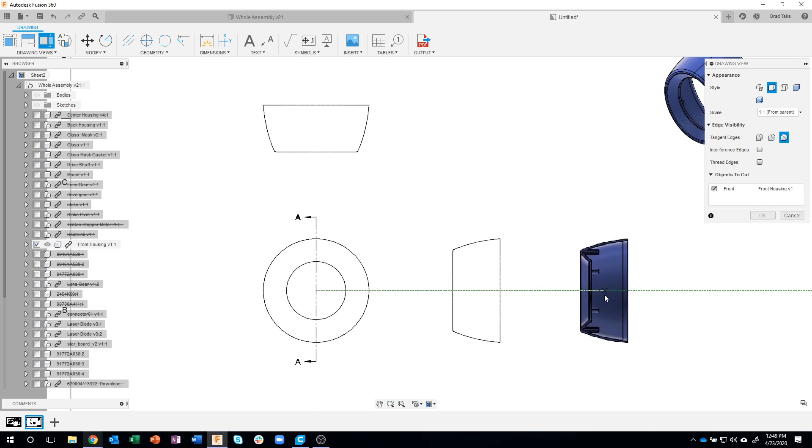I could create a section view. So let me do a section view, maybe of this guy here. It automatically finds the center for me, so we know that's a true circle. I'll come over here and place my section view, say okay, and sure enough, there we see the section view.

Let me do that one more time. I'll create another sheet, base view. I'll set it to 1:1, like so, and I'm just going to throw it on the screen. Again, I don't really care right now.

Okay, let's do the complicated part. We'll pick the center housing this time. So I'm going to click on center housing, right mouse click, and say suppress all except for the selected one. Then I'll come in here and edit my view.

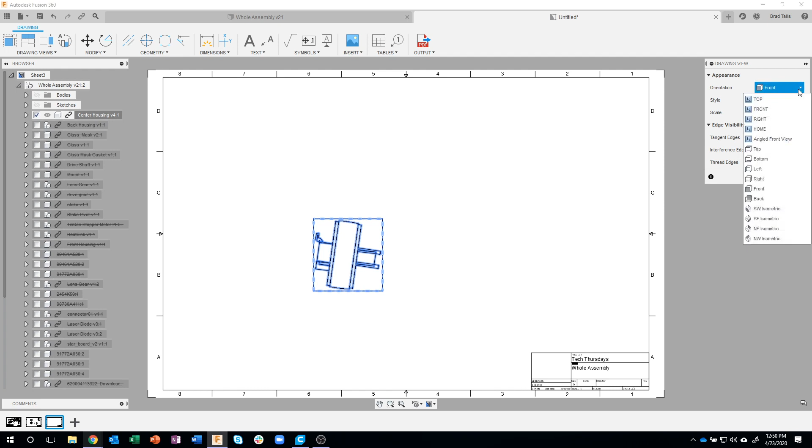Change it to my angled front view. Let's see what that looks like. I want to show all of the edges, and we'll make it scale 1:1.

And now I can create projected views off of this view here. So I can do all of my top, right, isometric, section views, etc. I like to have these shaded.

Now, for those of you that have played around with the drawing environments, there is a really cool option. I'm not going to spend a lot of time on this—I have a live stream all about drawings.

But I could come in here and say new drawing, and you'll notice there's this new drawing template. What this allows you to do is actually create like a top, front, right, and have an isometric that's shaded, and the default scale is 1.

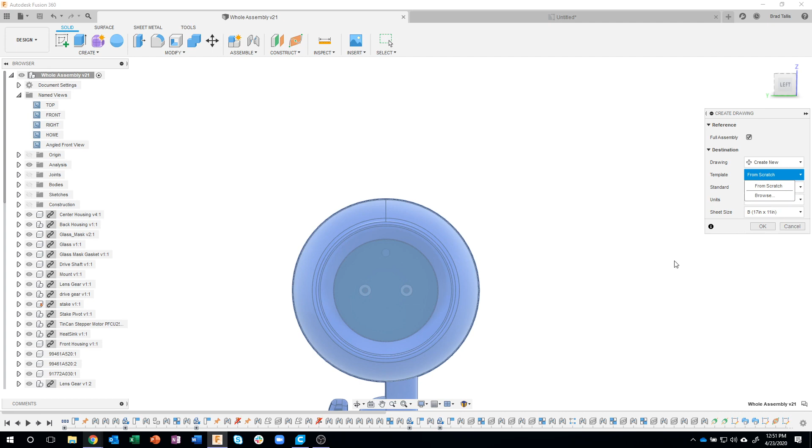And it has general notes and all that kind of stuff. And then when you say create a drawing from design, you can actually pick that template. Now I don't have any right now, but I would come in here and you would see whatever template I named it, Brad's exploded template or something like that.

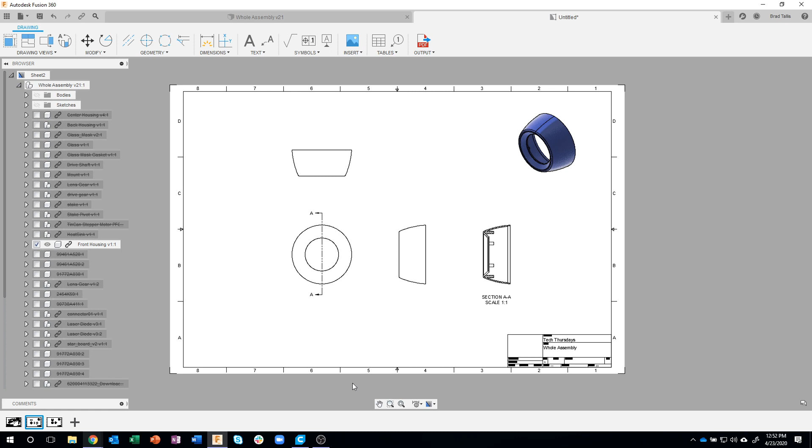And it would automatically create all of these sheets for you. So the first sheet would be an exploded view with a table. The second sheet would be individual components with a top, front, right, and a shaded view, etc. It actually creates all of that stuff for you automatically. It's pretty cool, but I'm not going to show that in this example.

Okay, now that I have this guy, I could spend the time to dimension it. So put my center lines in there. Maybe I want this view to have hidden lines. Then I can start dimensioning.

So here's another tip I want to share with you. I get this question a lot: my dimensions are really small, I can barely read them. Well, down here is your annotation settings.

I'm going to click on that, and we can specify what font we want to use. We can specify the text height, so I'm going to do 0.24. We can specify, is it decimal or fractional, and what's the precision—2 decimal places, 3 decimal places, 1 decimal place, for example.

And then does it display the annotation unit, does it display trailing zeros and leading zeros? So for example, I set the text height and set the trailing and leading zeros. So now when I do a dimension like that, I'll do another dimension here—you can see there's the 3 decimal places with the trailing zeros.

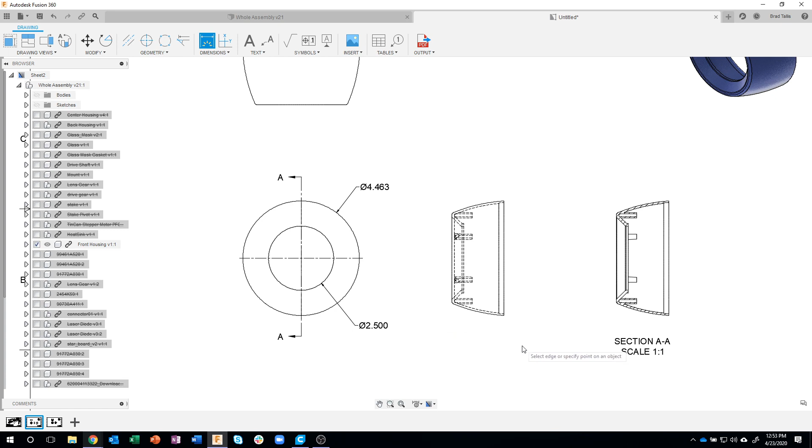And this is extremely smart. I'm still in the same dimension command, so there it just did some diameters. Now it's doing dimensions. If I were to click this line and this line, it's going to do angles for me.

It does radiuses, so let me see if I have a radius. Let me zoom up here real quick.

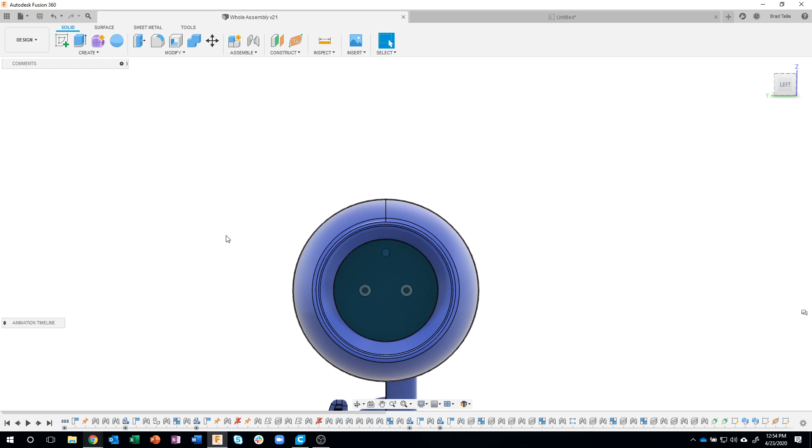Okay, I'm going to go back and answer that question about the storyboard in the animation workspace. So I'm going to jump back to my animation workspace. The question was, what if I accidentally created a storyboard? You can right-click on any of these storyboards down at the bottom, and you'll see you can delete them, you can copy them, you can even reverse them.

So instead of it exploding out, I'm going to say reverse, okay? And then it's going to think for a little bit. What it'll do is it'll actually assemble it together. So instead of exploding out, it's going to kind of go back in. So it's reorganizing all of these.

And so let me rewind. Let me go to Storyboard 2. There we go, I'll rewind. So there's that guy. Okay. I'm sorry, I reversed Storyboard 1. Brain's not working. Okay, so now this should be reversed.

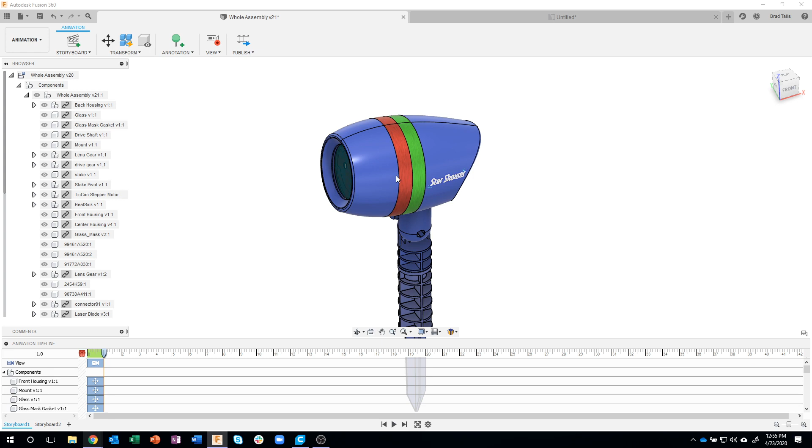It's going to be really slow, but now it should show it going back together. So instead of really slow, it's going to be really fast. It's starting exploded and then putting it back together. So you can do the reverse. That's how when you right click here, you can delete any of those if you accidentally create some.

Okay, now we use Storyboard 2. I'm going to make a change to this. So I'm going to transform, and I'm going to put these guys in front of the housing. Okay, and in fact, let's pull that back just a little bit, just to make a significant change that you guys will recognize. Not that I would put them in front of the housing, but you get the idea here.

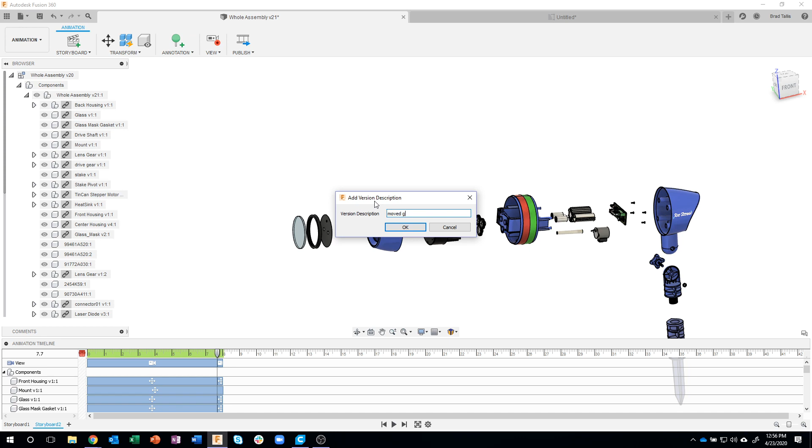Okay, so I'll say okay. I'll go ahead and save this whole assembly. Moved glass. Okay, so I made a change to my storyboard.

I'm going to go back to my drawing, and you'll notice it says warnings, changes have been made. Well, let's go to this front image here, and you'll notice nothing has changed yet. That's because I have to click on this icon here. It says drawing is out of date, it's referencing an older version of the design.

Also notice because I changed my text height, my table got really big, so I'm going to have to fix that here in just a second. So I'm going to go ahead and click on that icon, and we should see that this will update and the glass will move in front of the plastic front housing. Okay, and there we go.

And you'll see now it kept the BOM numbers and stuff like that, so maybe I need to renumber these. I might need to scale it down a little bit or reposition it or whatever, just because of the spacing or whatever. But you can always go back and make a change to your storyboard, and the drawing will update accordingly. So for example, I don't like how crowded this is right here. I would probably go back to my storyboard and move some of these around so I have a better representation of what that's going to look like.

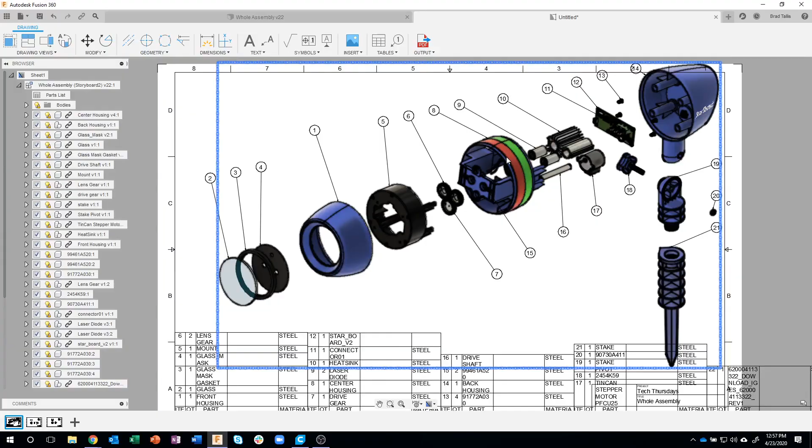Okay, so this is the end of this project. Now I know some of you were hoping that you could 3D print it and actually make the lasers work and project things, and that's not what this was all about. It was more about taking something, kind of reverse engineering it, and showing you how would you go about designing plastic parts, multiple components, linked components, bringing in ECAD stuff like the circuit board, for example. So this project kind of covered a lot of that, adding realistic materials and decals.